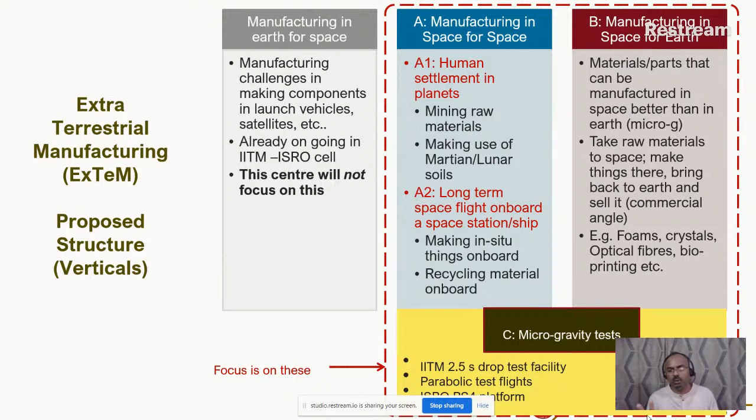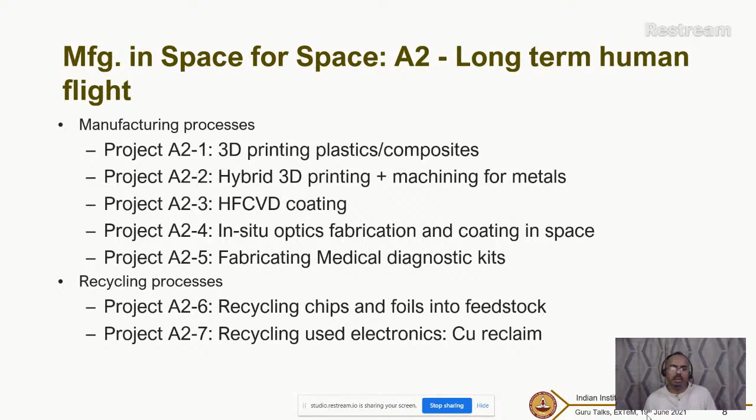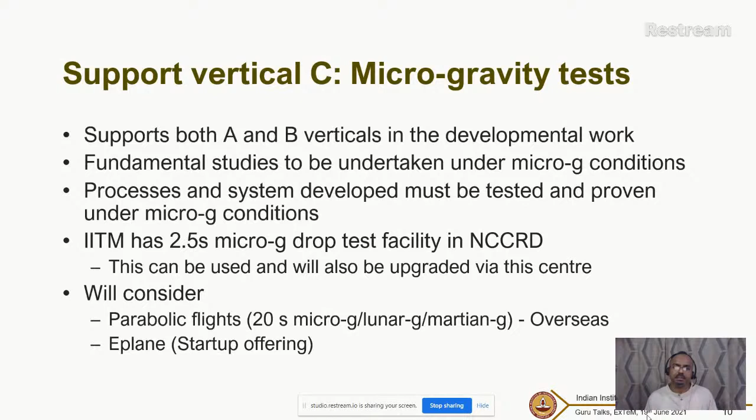And microgravity tests. I'll talk a little bit about all of these verticals in more detail as we go along here. Okay, so before we go further...

We have to understand what is unique about all this, why space is so unique. Space is exciting, yes, but what are the constraints it poses, and what are some of the aspects of microgravity that we probably have to worry about as well.

Let's look at the constraints of space one by one. I listed about 5 constraints here. Obviously, the first constraint is space itself.

What do I mean by space? That means dimensions. If you think of the International Space Station, for example, or onboard a space flight, you don't have the luxury of a lot of volume, dimensions in space. So whatever we have to make, whatever we have to send, has to be small in dimensions. We have to figure out how to make things work in a compact space, so to speak. That is obviously a major constraint.

Here on Earth, we have the luxury that I can build a big machine tool, I can have a lot of space. I can do stuff that is not possible in space. So we have to rethink how to reconfigure some of these machine tools and make them in a smaller dimension. A second constraint is energy.

Obviously, the principal source of energy right now up in space is the sun. So you have solar panels deployed and so forth. But compared to what we can get here on Earth, the energy is limited there as well. So whatever machines we make, whatever processes we think of, have to be really energy conscious. We have to optimize towards the concept of energy as well.

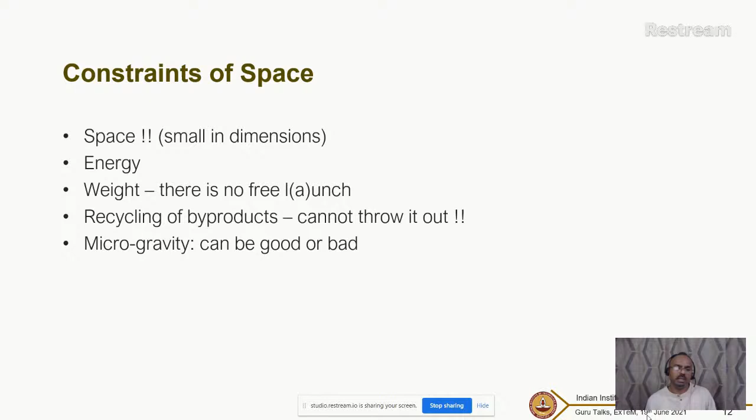Microgravity can be good or bad depending on which processes you're looking at. These are the constraints in space, so we have to rethink our whole manufacturing processes and machine tools that we've been using for various processes, whether it's 3D printing, machining, etc., from these five constraints.

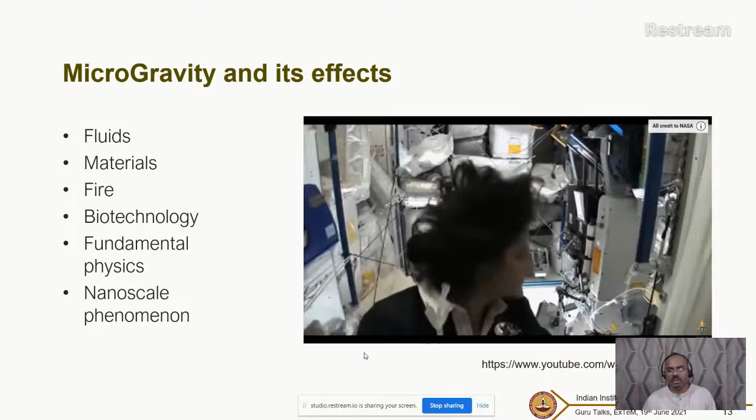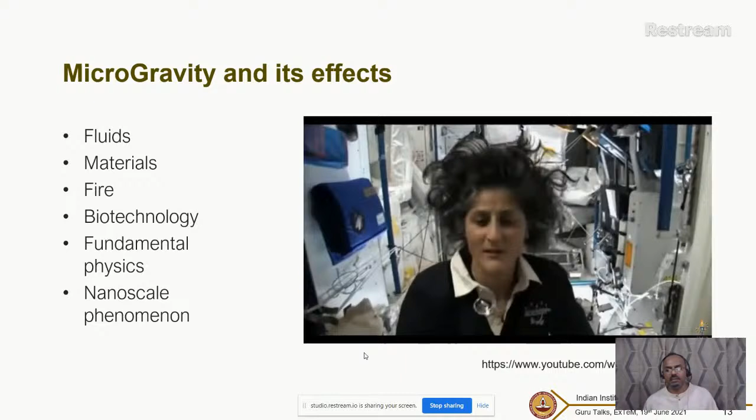If you think of microgravity and its effects, this video is of Sunita Williams in space. The effect of microgravity on fluids is obviously very clear. Because of surface tension effects, in the absence of gravity fluids don't behave like the usual liquids we think of on Earth. They take up different forms, and you have to deal with them differently. So microgravity obviously affects fluids, buoyancy, and so on.

The other things affected by microgravity are materials, especially when synthesizing materials—gravity plays a strong role, whether it's a foam bubble floating around or crystallization happening. Materials, especially nanomaterials, gravity has a strong effect during their synthesis.

The other aspect that is very important is combustion, flames and fires—there's a lot of studies done on fires. Another aspect where microgravity has a strong influence is biotechnology. If you're bioprinting organs or growing tissues and cells, gravity has a profound effect on Earth, whereas up there it can have certain beneficial effects as well.

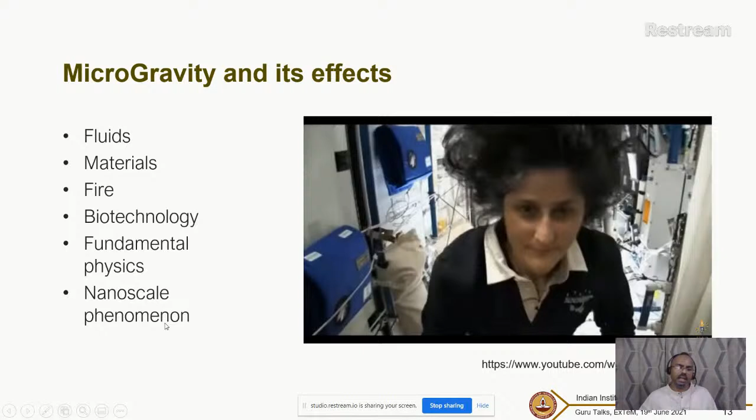There are also fundamental physics aspects people are investigating—it could be plasma effects, various fundamental particles, and so on. Also several nanoscale phenomena are affected by gravity. So in general, these are all the various aspects that microgravity strongly affects.

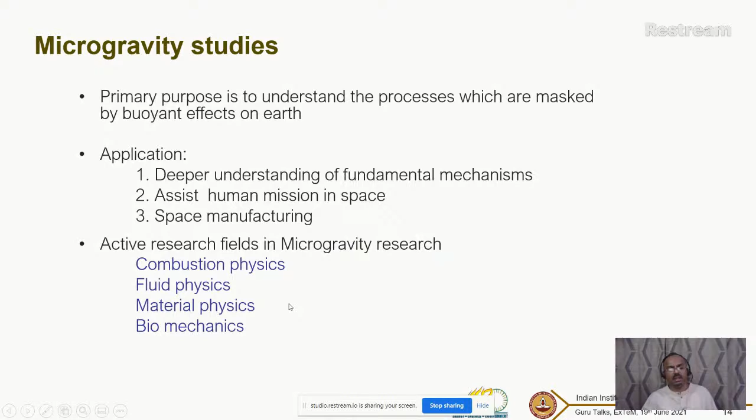Here's an example of combustion science, some of the work that's been going on in our drop tower facility. One of the major safety aspects on board a space flight is fire. If a fire breaks out, there's no way for you to get out—you're stuck in the spacecraft. So there's a lot of work done on studies of fire.

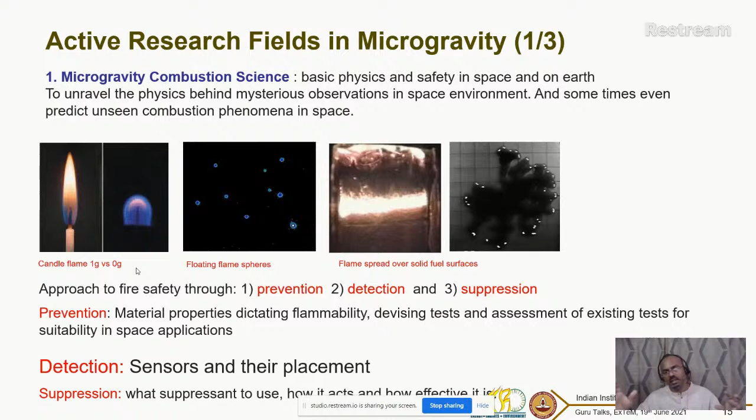It turns out gravity influences flames a lot, how the flames spread and so on. In fact, lack of gravity actually makes it worse. People are trying to figure out how to overcome this, including recently the group started a project on flammability studies for ISRO, and you have to figure out how to place sensors so you can quickly detect how the flame is spreading.

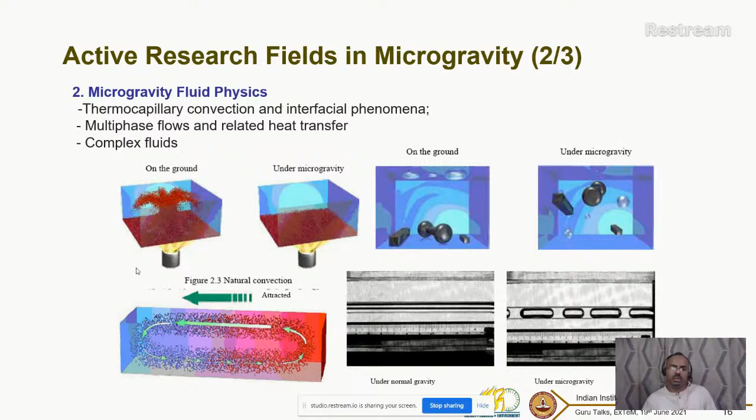Fluid physics—I'll not spend too much time on this, but various phenomena of thermocapillary convections, multi-phase flows, heat transfers, complex fluids, etc., are also affected by gravity, and many such studies have been going on in this area.

In material science, solidification processes and crystal growth: if you're crystallizing materials from a liquid state to a solid state, gravity plays a big role. Diffusion processes can happen in gaseous form too—crystal growth doesn't have to be only from liquid form. With vapor deposition processes, crystal growth can happen from a vapor state as well, and gravity has a very strong effect on that.

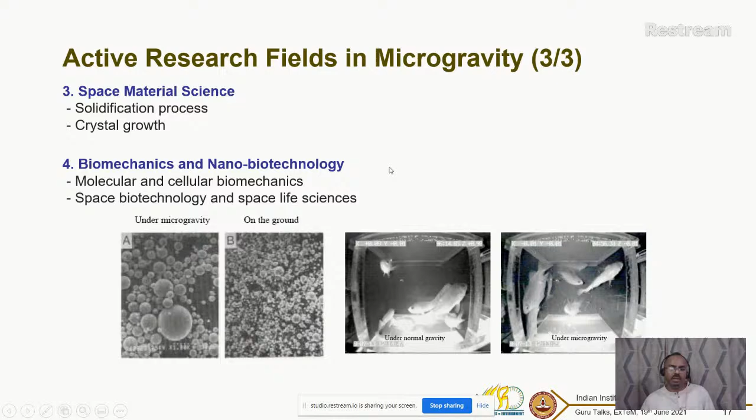Biomechanics and nanobiotechnology are also widely studied for effects of microgravity. For all of this to happen, we of course have to have microgravity. We can't all go to space to do experiments, although some experiments are happening in space today. But achieving microgravity becomes a major challenge.

Here is a simple graph that shows on the y-axis levels of gravity. You can see 10 power minus 1 is about 0.1 g. We are on the Earth, so you have 1 g. This is talking about 1/10 of this g, and this is about 1/millionth of a g, 10 power minus 6 g.

On the x-axis is a very important scale, which shows you the time that microgravity is available, whether it's for a few seconds only, a few minutes, few hours, few days, few weeks, months, or years for us to do the experiment.

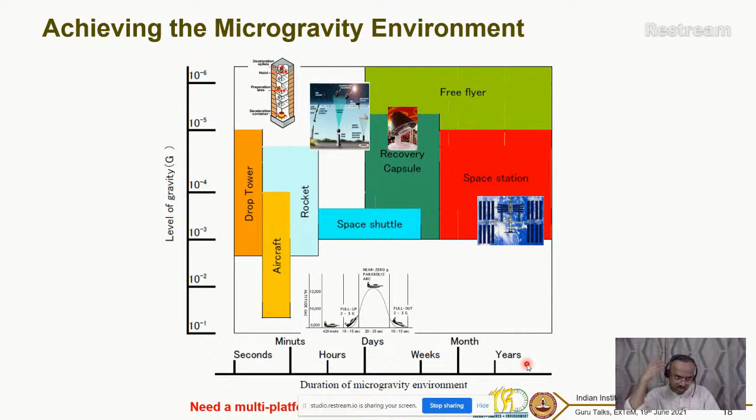For example, if you take the space station, the International Space Station, which you've all seen in the news, you can get G's of 10 power minus 4 to 10 power minus 5, and you can get that for months or years, because the space station is going around and round, you can do an experiment that can run for a long time. This is a very luxurious option, which unfortunately India doesn't have because we're not partners in the space station.

Whereas if you have something like an aircraft, like a parabolic flight, you can climb into an aircraft, and it will go through certain trajectories, some of which are shown here. In that case, you can get up to 10 power minus 4 Gs, but only for a few minutes, we're talking about 15-20 seconds, something like that.

Or you can have a sounding rocket, which gives you slightly better in the minutes range. Or if you have a drop tower, like what we have on our campus, you are talking about microgravity that will last only for a few seconds. I can get 10 power minus 5 to 10 power minus 4 Gs in the drop tower, but it will barely last for a few seconds. I'm going to show you some videos that we took.

So if you really have to do experiments in microgravity and get benefit from this, you need access to a lot of these platforms. You could start with the drop tower and do a few experiments there, then move to a parabolic flight and get some few minutes extra, and ultimately you want to go to the space station to do experiments. That's what all countries are trying to do. We have one space station, a collaborative effort of many countries, and several other countries are trying to launch their own space stations as well, as you might have seen in the news.

So achieving microgravity will depend on two factors: the level of microgravity you can get, how low G can you go, and the time it is available for. Those are the two important factors to remember.

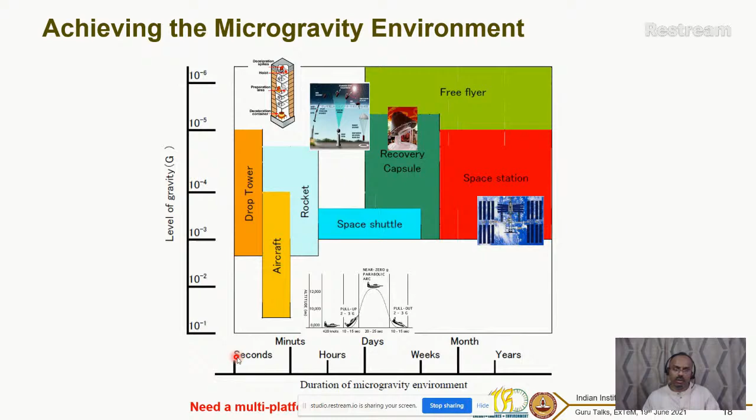So what do we have on our campus right now that our group can make use of? We actually have a microgravity drop tower, shown here in this picture. As the name implies, we're going to drop something from the top, and it's going to fall through this tube down here. And then somewhere in the line, I'll get microgravity.

It's about a 30 plus meter free fall. You can get up to 10 power minus 4 Gs depending on how you design your capsule, in capsule-in-capsule mode. At the bottom, so you don't want to crash your setup, you have an airbag deceleration system, and it operates in ambient environments. You can get only 2.5 seconds of micro G, just a few seconds.

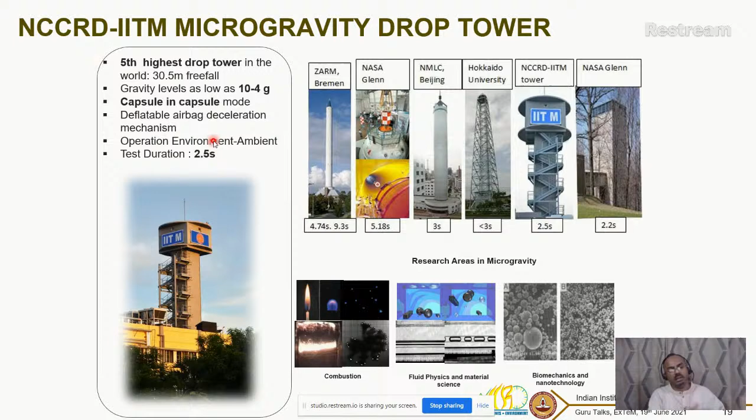It's very small, but this is sufficient to do a lot of tests. It is not sufficient to do so many other tests, but there are some things that we can do with about a 2.5 second microgravity test.

Okay, I'll maybe skip this. Oh, okay, it does play. I'll skip this one here.

This just shows you details of the setup. This is the picture, if you see from outside far away, this is the setup on the far left. And if you zoom in, you can see this is the top one where the IITM symbol is, then you have this long channel through which it falls, and this green one at the bottom is where your deceleration units are.

So what are we going to drop? We're going to drop what is called a capsule. The capsule is shown here, and within this capsule we put all our experimental setups inside.

We are designing about 5 setups right now for various manufacturing processes, and they will all be sitting inside that. So we have to figure out how to pack our stuff inside there. That stuff means our experiments and all the sensors that go along with it - it can be a high-speed camera, a temperature sensor, a pressure sensor, for instance. They all have to go inside.

To facilitate our arrangement, we have racks here. Some racks will remove, some racks will keep. We may have a power supply on board, and we may have a DAQ system to collect data and so on.

On the top here you have to have a mechanism to hold the capsule and then release it without any jerk so that it falls vertically down. There is a hold and release unit mounted on the top here.

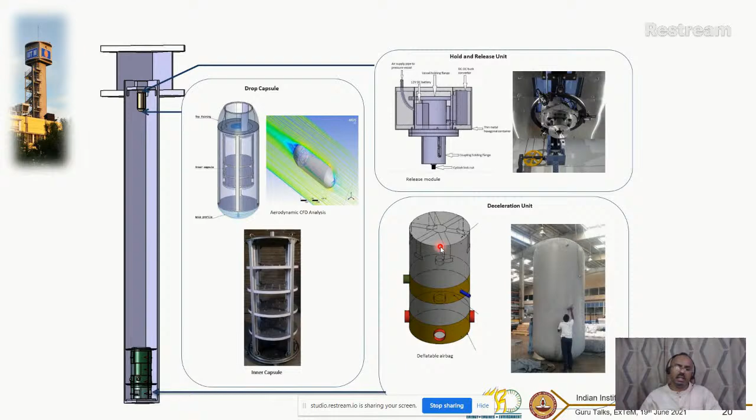At the bottom you have a big system, just like a big airbag, actually a huge airbag. You can see how deep that airbag system is - you can see the person here, so it's about three people tall, something like that. And it has to be at the right pressure, and it has to deflate at the right pressure rate as well to prevent damage.

So for more details, I'll show you some videos. This is just the deceleration unit alone. You can see how it is stacked down below the basement here, and it has the basic thing which is an airbag.

So you can see some of the details, I'll show you a video later. It has sand layers and foam layers besides the airbag - there's an airbag on the top, before that a foam layer, and finally a sand layer to decelerate the units.

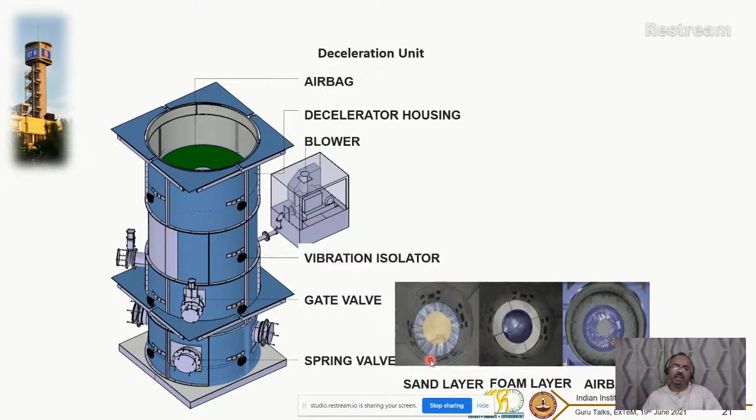So this is sort of what our system here is. The system, as I said, includes - if you want to do an experiment, you have to measure stuff, so there's a measurement and data acquisition system that is also available in that.

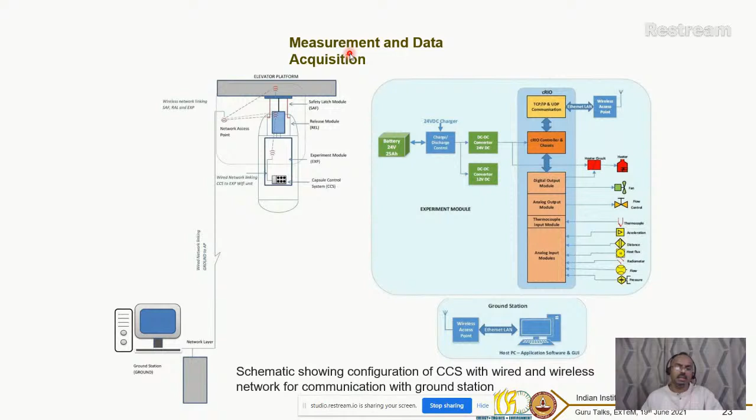Some of them are wireless, so I can actually control some of this from outside in terms of data collection - starting the data collection, stopping the data collection. I can even trigger some things to happen remotely, so there is some wireless control as well.

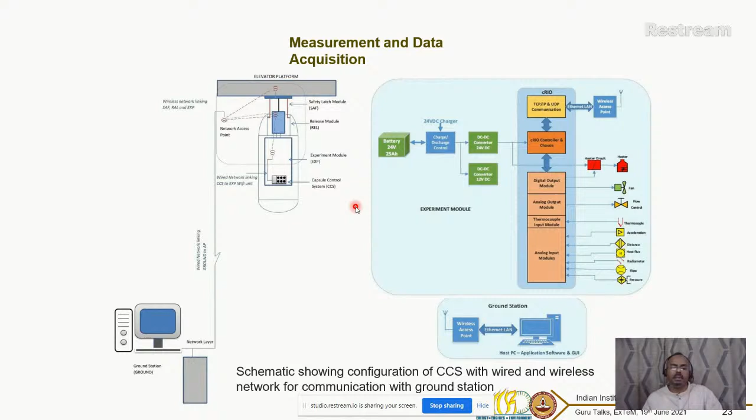But since this is only 2.5 seconds of microgravity, I don't really need to collect data and send it wirelessly. We actually store that data locally on board the system here, and then after it drops down at the bottom, we go down, collect the experimental setup, take the memory card out, and get all the data out. So there is some wireless and some wired networks as well.

So here is an example of how this thing would probably do. I'll just play this video here - this may be a bit choppy over the streaming, but let's see. Hopefully - so what you see here is the airbag down here.

This is looking down the whole tube, the drop tube, and you see something at the top here. You can see here, this is the actual capsule. This capsule will drop down all the way to the airbag, and that's what we're going to see. This is the airbag, this is the capsule, and this is the view looking down the whole channel from the top. Okay, so let's see what happens.

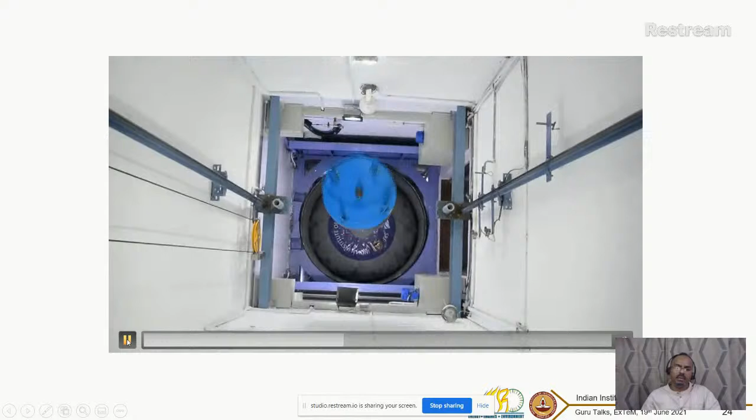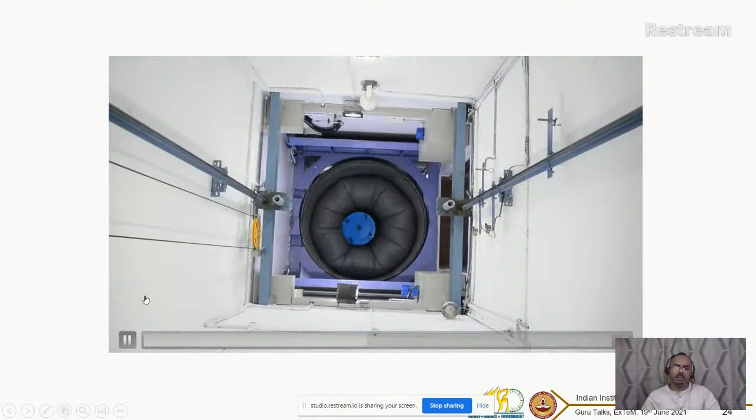So see how the airbag is deflating. Let's play this once more. It drops down all the way down. So during this drop, somewhere in the middle, we get 2.5 seconds of microgravity. So whatever experimental setup I have to do, I have to collect the data in those 2.5 seconds and study the phenomena in that process.

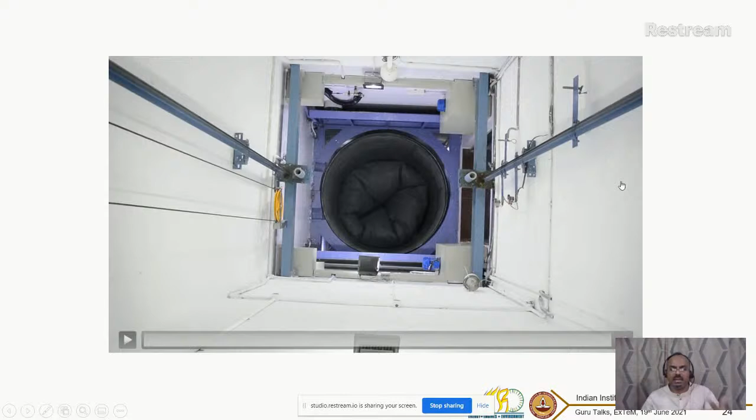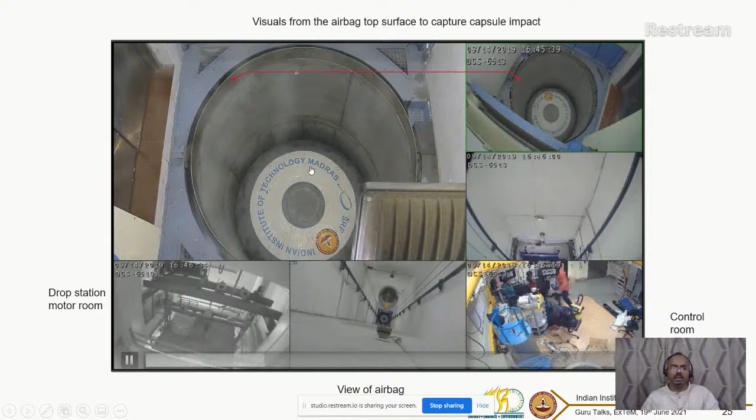Okay, so there are more visuals here. I'll just play this along while I'm talking. You can see the different camera viewpoints here. This is the control room. This is a close-up of the airbag. It happened very fast here, so I'm just going to play this again. This is not a slow motion video, so you can see it's dropping down here. You can see at different points where the camera captures this capsule falling down.

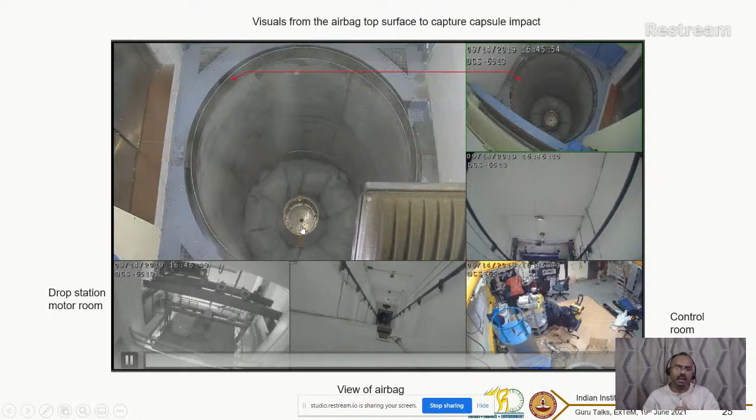Okay, so the control room is down here. You can get data and see what happens. Of course, you have to go down to the bottom and retrieve the unit.

So this whole jar was inside the capsule and it was dropped from the top. Somewhere in the middle you get 2.5 seconds of microgravity, and that's all you can get, 2.5 seconds - that's what it's all about. So that time interval is always available to do an experiment. This is the kind of experiment facility we have recently set up on our campus, and it's available for our ExTeM group to use.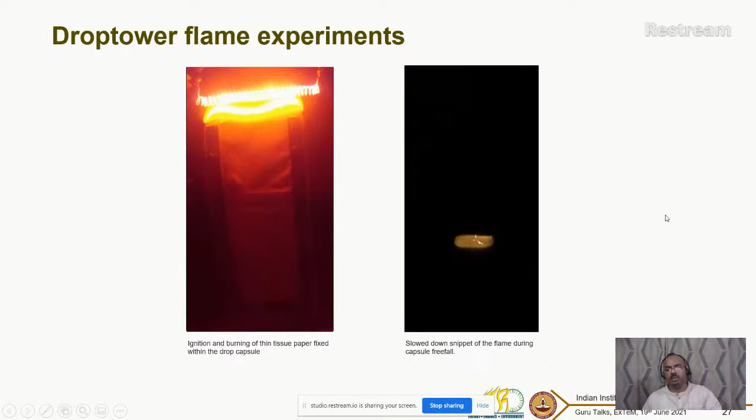Okay, so there have been some flame experiments done. Here is an example. There's actually a tissue paper here. You start the flame at the tissue paper using a hot wire arrangement, for example, and then study what happens to the flame as it travels down. This kind of experiment can be done - you start the flame, drop the whole capsule into the tube, and see what happens to the flame at different stages of the arrangement.

So there's a very small interval at which the 2.5 seconds happens, and your flame behavior can be studied in this fashion. I'll show you some more detailed pictures a little bit later.

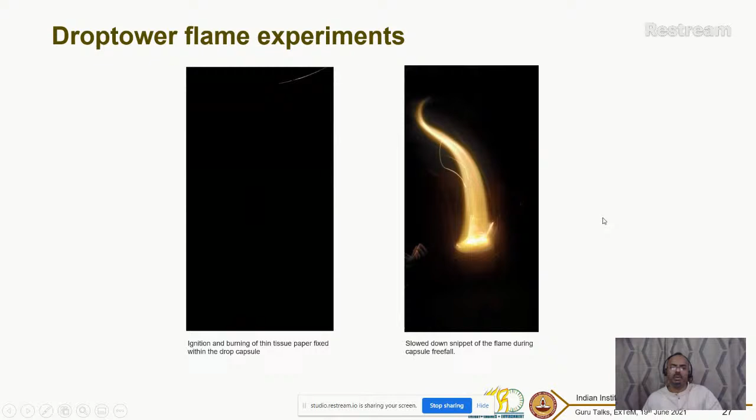Okay, so here are more still pictures. We actually have a camera observing the whole thing - the whole camera drops down along with the capsule itself, and you can get this kind of picture. Here is normal gravity, what happens. Here's microgravity - the flame is almost extinguished here, as you can see. At the point of impact, you get high G, so you get a different picture. This is the kind of facility available for us to use to simulate microgravity on our campus here.

Okay, so based on this, for the ExTeM group, we have right now 5 drop designs going on. For example, we are looking at microplasma arc transfer - if you have to do 3D metal printing, we need to understand what happens to the plasma and how the transfer of the metal drop happens. That is something we are working on. We also have another setup studying machine tool structures - if I were to use a machine tool in space, how is microgravity affecting the dynamics of some of these machine tools? We have a setup going on there. We have a micro-G setup for metal foaming - I'll talk a little about that later - and also about diamond growth.

So we're trying to grow some diamonds as well and see. Of course, the small time scales are very challenging. We'll have to see, even if it's nanometric growth, we can probably see it. So we are doing a setup on that. And finally, a 5th setup that is going on in polymer printing as well. So it's again 3D printing, but more on the polymer side. So both metal and polymers we are looking at. These are the 5 setup designs that are ongoing right now. We're hoping that sometime in the near future we'll have some results to show as well.

Besides this, we're also exploring some parabolic flight options for us to consider. As I mentioned earlier, parabolic flights give you slightly longer durations. From seconds, you can go into tens of seconds. And you can be next to your setup right there, and then you can actually switch on stuff and see.

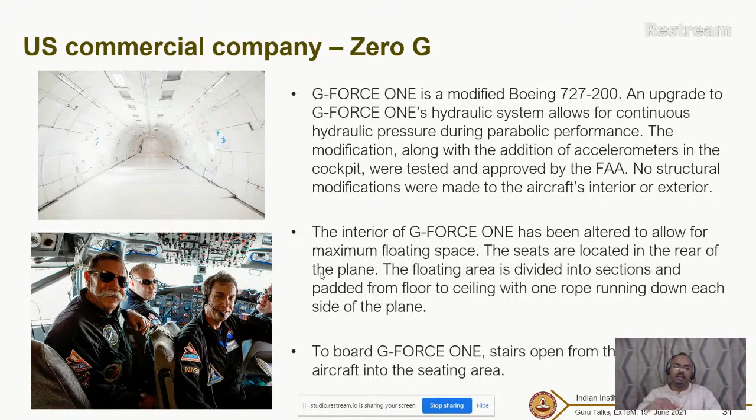We will do the drop tower facility experiments first. We'll move to parabolic flights at the next phase, so to speak. Of course, it'll also be nice if this option is available in India.

If you see what it takes to make parabolic flights, you basically need a plane like a Boeing 727-200 or so. There are some modifications needed for the hydraulics because of the way the plane climbs very steeply and comes down. You need accelerometers on your dashboard, which is not normally available on a commercial flight. Of course, you have to remove all the seats, add paddings all around because you don't want to be bumping into hard metal. You need to get door access from the tail end, since there are no doors on the sides, only the tail end.

You go inside with all your setup. Of course, you have to get flight certified. And if you're a commercial company, you have to sell flight time and make money. We're hoping that some Indian company will take this up as well. I'm talking to a few people, but it's a tough industry to be in right now for the airline industry. Of course, you have to lease the plane, airport charges, running costs, maintenance costs, and so forth.

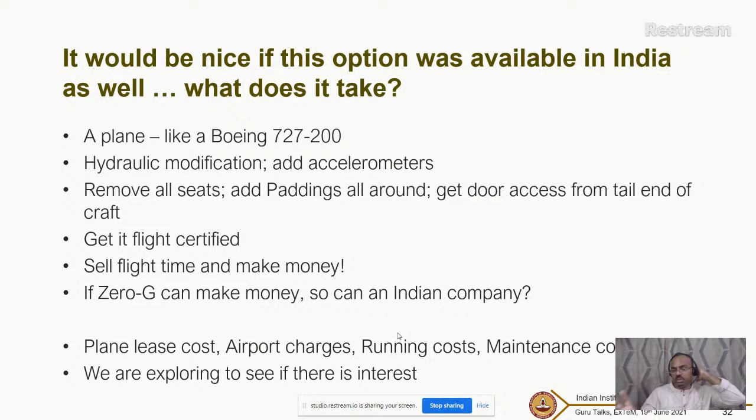So we're exploring to see if there's any interest in India for these parabolic flights, mainly because our commercial options outside India are very expensive, which we cannot afford right now.

Okay, so that's all about what is ExTeM. I told you about, we talked about microgravity, what are things that microgravity affects, how to get it on Earth. So I'll spend a little bit of time now on the aspects of what we are trying to do here in making space for space and making space for Earth. I have about 10-15 minutes or so left. So I've picked a few projects only because some of them are still ongoing. I can't talk in too much detail yet about these because these are projects in progress or just initiated actually.

Okay, so I picked two projects for making space for space. So what is making for space again? We are trying to make stuff in space for space use itself. One of the projects that my colleague Piyush Chaunsali from the Civil Engineering Department is trying to do is make space concrete.

We all know about concrete on Earth, right? It has a lot of ingredients - you mix water, it sets, and you can make buildings and structures out of it. Of course, the raw material for Earth-based concrete comes from the Earth. We dig up, we get this blue metal, so to speak, those little stones, the cement - everything comes from the Earth.

Again, we prepare it, and you have to mix it and make it into the right proportions and so forth. But when you go to Mars or the Moon, we have to figure out how to make use of the material that is already there.

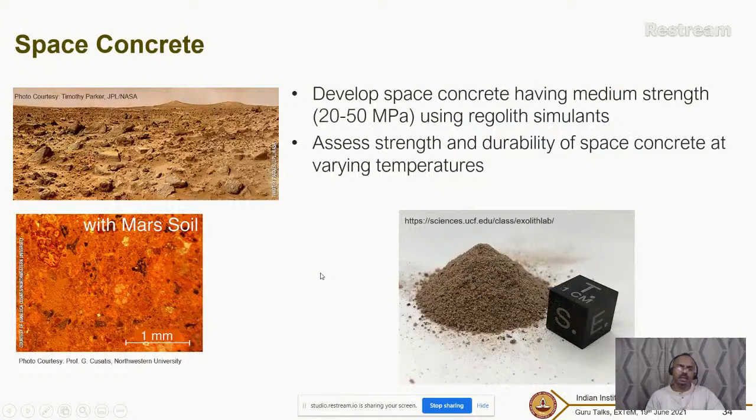Of course, the pandemic has created a few challenges to get some of these things going, but we're hoping that soon we'll be able to work quickly on this. Okay, so these are the two things happening in terms of make in space for space: space-based concrete, and this unmanned drilling robot system.

The next one I want to talk about is making space for Earth. That is, we want to make certain materials that are amenable for making better structures in microgravity conditions, and then bring them back here on Earth and see if we can get better material structures. In that, there are two projects I'll talk about: one is the metal foam, another is diamond growth.

Okay, so metal foams. We all know about sponges, right? A sponge is a foamy structure, as you can see here. This is actually a polymer, and you can see there are a lot of huge holes in the polymer structure. Because of this, it's able to wick water and use it, and also it's lightweight - the entire polymer is lightweight because of this. Now imagine a sponge like this, but made in metal.

That's what we mean by metal foam. So this structure we are actually able to make in metals also. These are some of the foams made in our labs here - this is Professor Sankaran's lab, from the Department of Metallurgy and Materials Engineering, for instance.

Here you can see the open foamy structure. Let me zoom in a little to show you - so here it is, you can see the foamy structure with the blowholes, etc. The same thing you can get in a metal - this is actually an aluminum alloy. You can see the difference between the solid, where there's no foam, and here where there is a foam, for example.

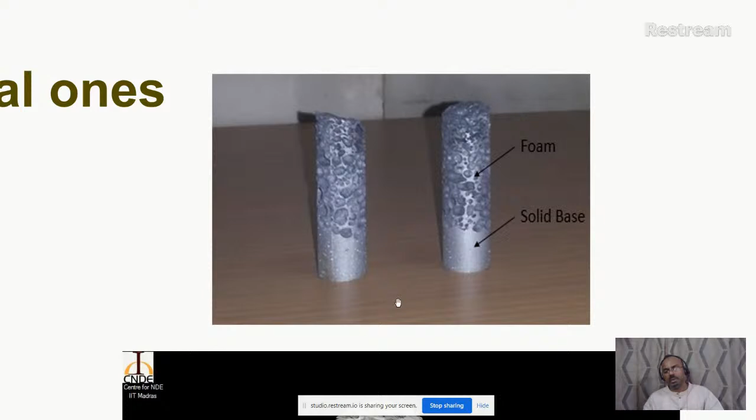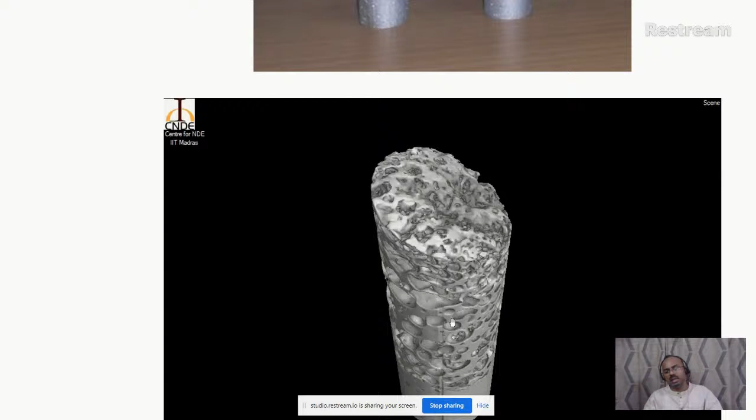And here's a picture of a CT scan. Just like how we do CT scans in health centers and medical facilities, you can do CT scans with these as well, and get a precise location of a particular foam. The entire 3D model can be made as well. We put the sample into a CT scan machine, which we have here in the machine design section, and you can get a complete picture. You can slice it at each position and see, without physically having to destroy your sample, where the particular pores are, for instance.

So this is something that is already ongoing - we can actually make these metal foams here on Earth. But there are significant challenges in this. The way these metal foams are made, you actually melt aluminum - you have molten aluminum, and when we put some stuff inside, that will create gases inside.

We add TiH2, for example, or other particles inside, which will release hydrogen gas and form a bubble. This bubble will start floating around - there are buoyancy effects, it'll start moving around inside, and gravity influences this a lot: how the bubbles form, the expansion rate of the bubbles, and so on. Gravity influences some of this foam formation so much that it actually inhibits these foams from forming in several materials.

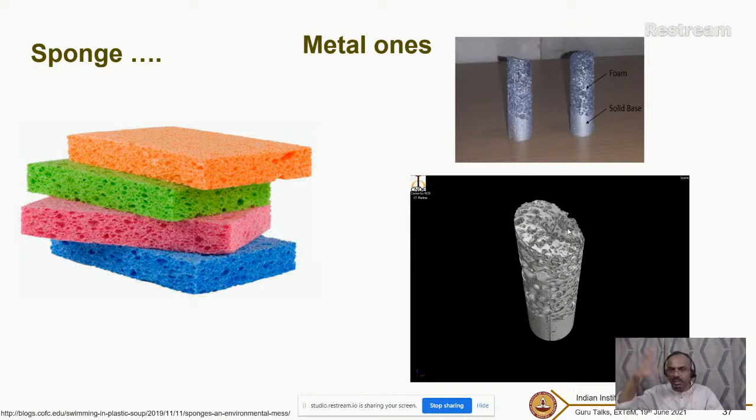That's why we think microgravity can have a significant effect on this - you can switch off gravity, so to speak, and study what happens to these bubbles as they form, and the rate of change of the expansion of these pores. We think there's a lot of advantages in doing some of this foaming out in space where gravity is very low - you form the material there, create a nice foam, bring it back to Earth, and use it for whatever you want. And we're not the only ones thinking about this - some people have already done work here. You can see this is actually bulk metallic glass foam that has been made in space.

BMG stands for bulk metallic glass. Normal metal is crystalline in structure, but this particular metal is actually in an amorphous state. Crystalline means there's a lot of order in the metal, whereas amorphous means there's not much order in the system.

Creating foams in bulk metallic glass is very difficult on Earth, because gravity doesn't allow this expansion of foams to happen inside the structures. So if you switch off gravity, there's a lot of possibility of creating foamy structures in bulk metallic glass.

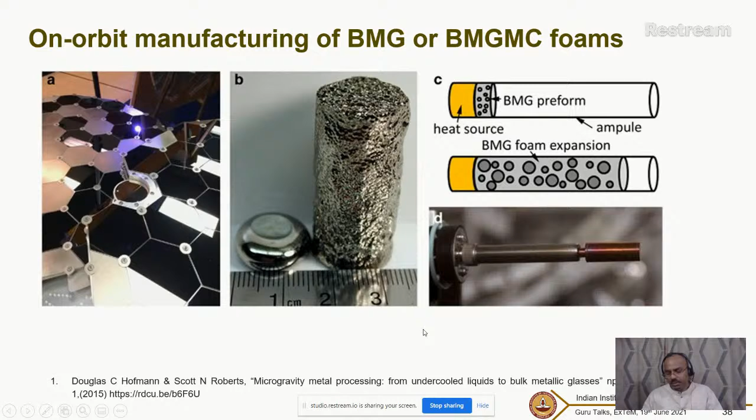There are different kinds of bulk metallic glasses. We're trying a particular type here to see if we can actually use that to foam.

Why BMGs? They have high viscosity, and there's something called the sedimentation velocity for the bubbles used to make the foam, and they're very small compared to aluminum - about 1 nanometer per second versus 1 meter per second. So very large orders of difference.

But BMGs have high strength and toughness. In fact, they're being investigated for high performance load bearing applications. And if you can actually foam it, you can reduce the weight, so they have a lot of advantages as well.

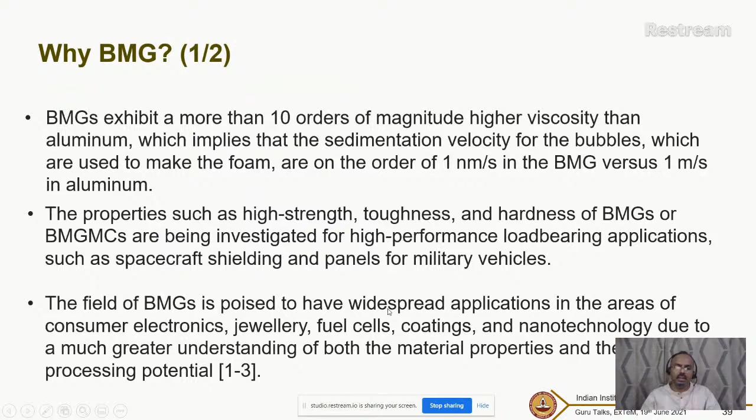There are also other consumer products you can make. In fact, they've already made bulk metallic glass products - if you used a USB long time back with a cover, some of those covers are made of bulk metallic glass, for instance. But consumer electronics, jewelry, fuel cells, coatings - they all have a lot of advantages in this.

So again, explaining more about why BMGs - packing them into a small launch volume and then using it to fill up a mold for free expansion, etc. Mainly for energy absorbing capacity, which is a major advancement required for space manufacturing.

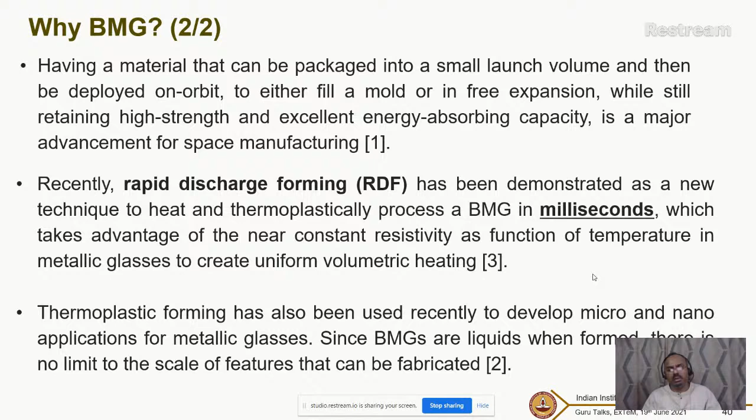There's another process called rapid discharge forming that's been demonstrated, and you can actually form BMG very, very fast. If you can combine some of this with micro-gravity and foaming ability, then it has a lot of advantages in making bulk metallic glass foams. That's the advantage of this.

The second project that's going on - one of many projects, but I'm just showcasing two. I showed the bulk metallic foam project, and we're building a setup for that. Another setup we're building is for CVD diamond coatings.

The use case for this is something like this: if you look at the current method of generating water on board a space flight, like the International Space Station, for example, they use something called the Sabatier process. Let me zoom in here a little bit so we can see.

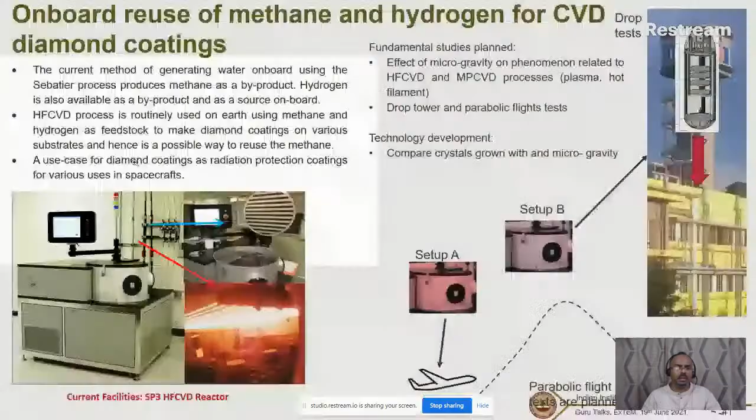The current method of generating water on board is called the Sabatier process, and it actually produces methane as a byproduct, and hydrogen is also available. So methane and hydrogen are both available, and people don't know what to do with it. They don't want to simply release it back into space, so they collect it now to see if they can reuse it.

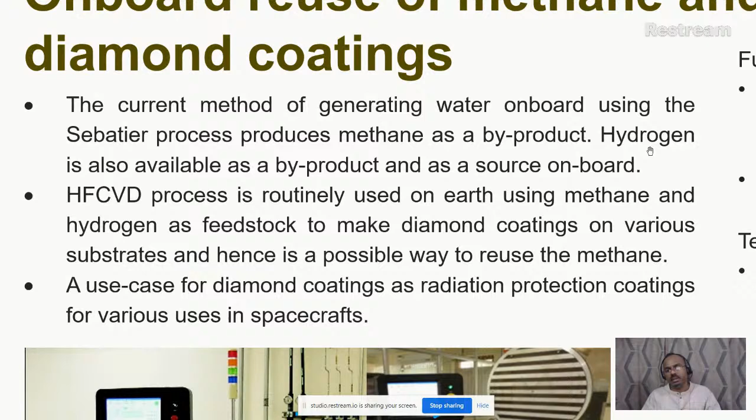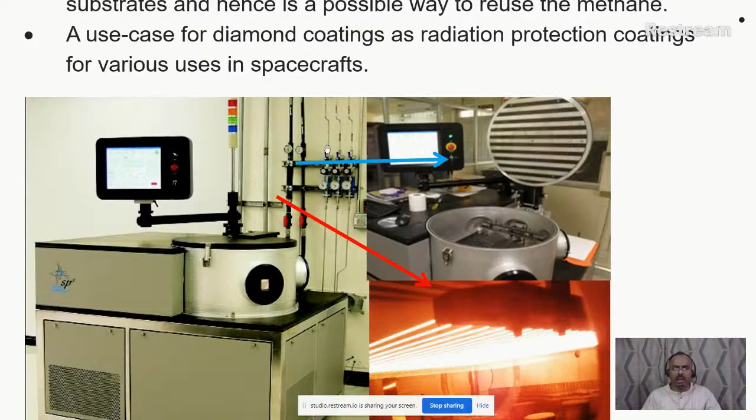One of the ways you can actually reuse methane and hydrogen is you can use this to create diamond. We actually have a machine here in our lab that does that. It takes methane and hydrogen - you can see all these pipes coming here that supply methane and hydrogen into this chamber. You can see this chamber is open here, and inside this chamber we have this.

Imagine an incandescent bulb, no longer in use today. You have a tungsten filament that gets red hot, and you get light from the bulb. Something like that is what we use here: straight tungsten filament wires, very thin, about 31 of them, heated to over 2000 degrees Celsius, and you feed in hydrogen and methane inside.

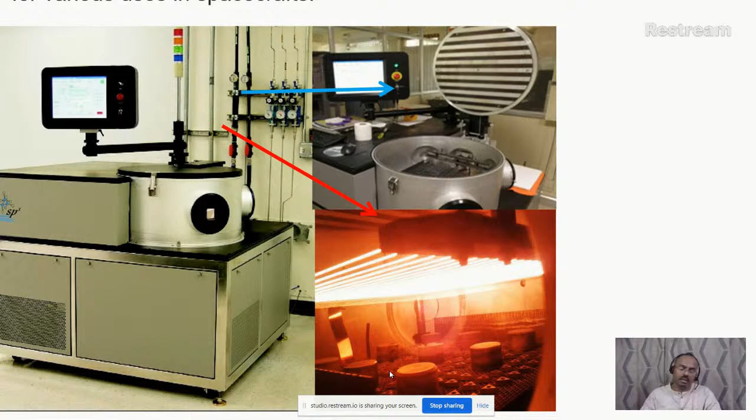Whatever substance you put at the bottom, you can actually grow diamond on top of it, because it breaks down the carbon. The carbon comes down, actually grows, and becomes a diamond structure under certain conditions. You have to have the right recipe for that.

So methane and hydrogen are available on board, so why not make use of it and see if we can build an HFCVD reactor that we can use in space. Here on Earth, this is the lab setup, and there's a strong gravity effect, so diffusion of how the carbon diffuses is influenced by gravity. In microgravity, we want to find out if diffusion helps us or doesn't work for us.

So we're trying to build two setups. One setup will simply look at some very fundamental phenomena related to this, which I'm calling Setup A. It's still in the design stage right now, so I'm not able to show you any pictures. And we want to build Setup B, which will actually grow these diamonds as well.

Right now we only have 2.5 seconds, and these are very slow growth rate processes. But within 2.5 seconds, even if I get a nanocrystal formed, I can still look at it in an SEM or electron microscopy and understand what is going on in terms of the growth process. So we are hoping to do that, and of course slowly move on to a parabolic flight system as well, so we are working towards that.

I didn't explain what CVD is. CVD stands for chemical vapor deposition. So we are depositing from a vapor state and growing crystals, such as diamond, for instance. That's basically what we're doing here. So we want to do a drop tower, and we want to go into parabolic flight as well. This is one other project that is going on.

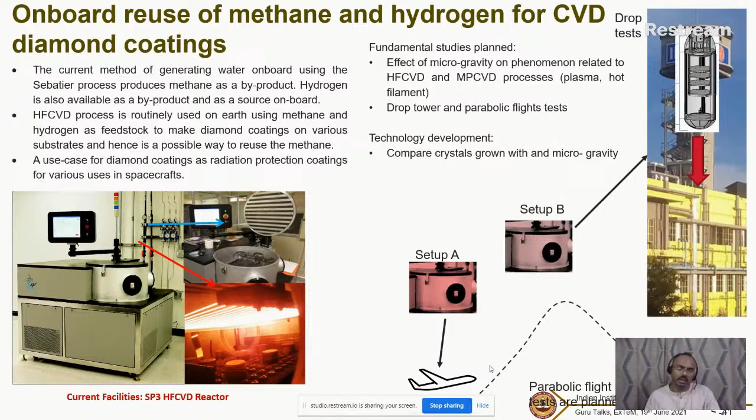So in this case, I showed you two case studies. One is for foaming metals, especially bulk metallic glass, and this one is about growing diamond crystals and studying the effect of microgravity on it.

Okay, so we've come to the end here. I've also exceeded the 45-minute limit, so I'll quickly finish up. So where are we at with what the world is doing? The answer is we are a little bit behind, India, when I say we, including IIT Madras here.

NASA, the European Space Agency, Japanese Space Agency, Russian agency, and now China as well, they are all planning for a lot of things: lunar, Mars, asteroid mining, settlement bases, etc. ISRO is also doing a lot of this planning. And many manufacturing processes have already been tested in the International Space Station. India doesn't have access to the ISS, but you can get microgravity there for long periods of time.

But even there, they have other constraints: space constraints, energy constraints, and so forth. But people have managed to do some testing of 3D printing. Machining has been done on a parabolic flight, for example, the good old workshop lathe machining that you guys did in your study here at the workshop—one aspect of that machine went on a parabolic flight and was tested.

NASA is planning a low Earth orbit economy—imagine factories in space. Elon Musk's rocket takes raw materials to the factory there, they convert it to material, it comes back down, and they sell it down on Earth. So there's some commercial angle also being looked at.

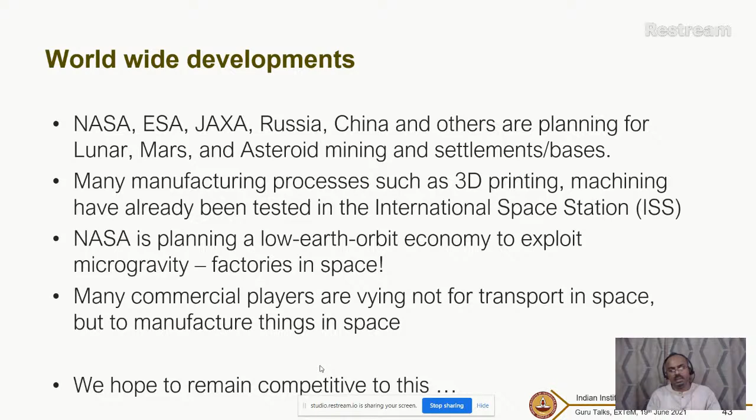And there's a lot of commercial players now. India is also trying to encourage commercial players, not just for transports in space, but also other things such as making optical fibers, making diamonds, and so on in space. So this initiative is a small one we've just started here. We hope to remain competitive in this, and see if we can actually do things a little better as well. So this is our team.